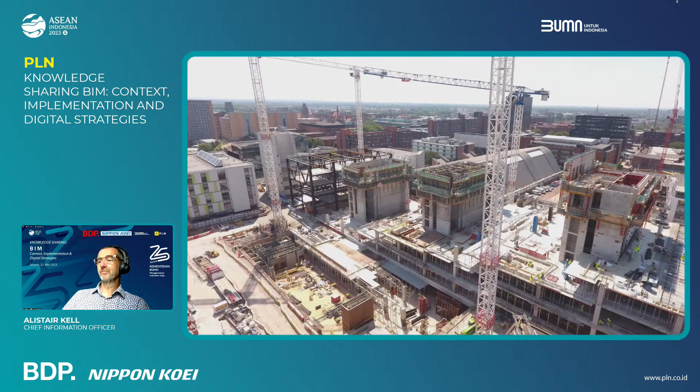The relevance of it is that everything I'm going to show you is a BDP project, built utilizing BIM from very early stages. This campus building opened in September of last year and is a major part of BDP's portfolio now.

A little bit about BDP: we have about 1,300 staff as part of the Nippon Koei group. Overall we're about 4,000 staff, and BDP has 19 offices across the globe. The majority of our staff are based in the UK, about 900. We have 250 staff in Toronto, and then offices in New York, Lima, Dublin, Rotterdam, Abu Dhabi, Shanghai, Singapore, and New Delhi.

BDP ourselves have 17 separate architecture, design and engineering disciplines, predominantly architecture, civil and structural engineering, mechanical and electrical engineering, public health, but we also have landscape architecture, graphic design, interior design, and everything really required for buildings. I have 3 projects I'd like to show you around BIM that we are currently involved in or have recently completed, just to set the scene on the scale we work at.

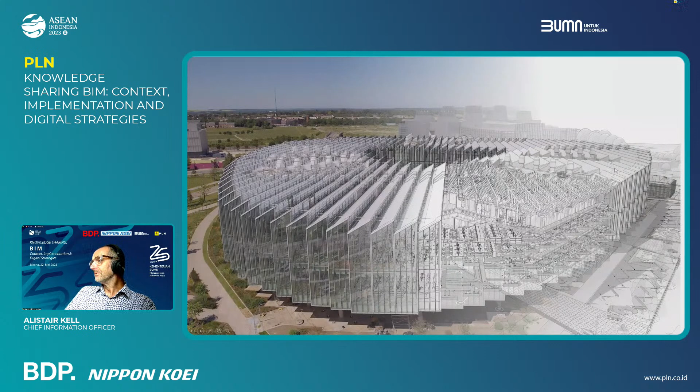The first is the AstraZeneca Global Research and Development Headquarters at Cambridge in the UK. This visualization begins to describe the research and development building itself. This was delivered utilizing BIM. The concept design was developed by a Swiss architect, but from the beginning of the process, BDP provided all of the engineering services and then architectural delivery services from the end of concept design.

You can see here the building above ground, but there is a 2-level basement. This begins to show the models for the main building. What's also interesting is in this top corner, you can see the models for the energy center, the heat pump array, which sits beneath a car park.

Moving on to the next slide, you can see this in more detail: a sustainable energy approach with ground source heat pumps and a service tunnel linking the basement of the main building. So BIM, you can see here, being utilized to coordinate the external services and begin to coordinate the structural arrangements, both concrete and steel, below ground and above ground.

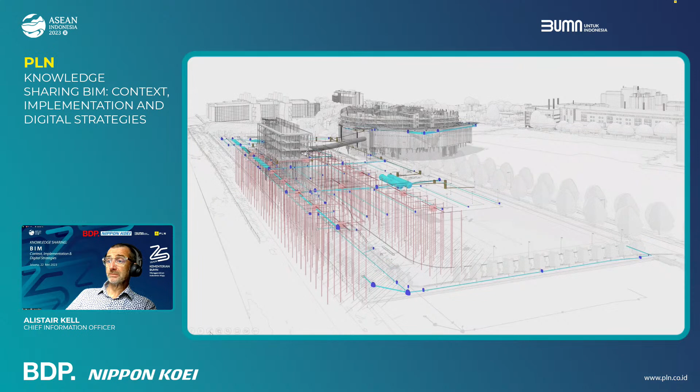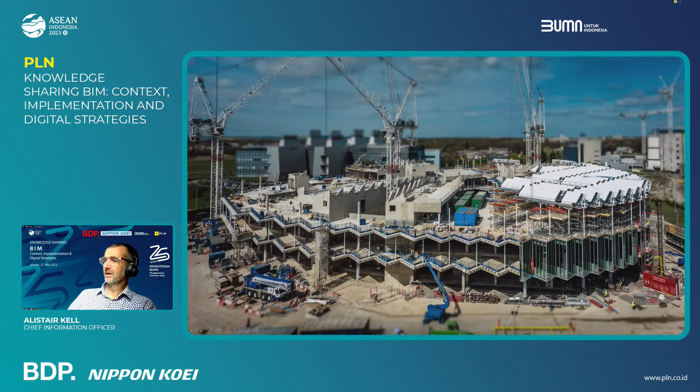This is an image of the building during construction. I won't go into much more detail, but other aspects were the pre-coordinated and pre-fabricated roof system here, and you can see the building as it's been finished and handed over in spring this year.

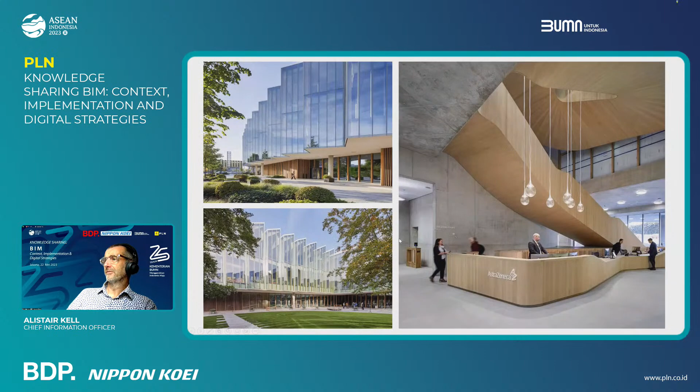Some more interior and exterior shots, and then a final picture of the main building itself. The scale of this is hard to understand from this image, but the perimeter of the main building is about 1 kilometer.

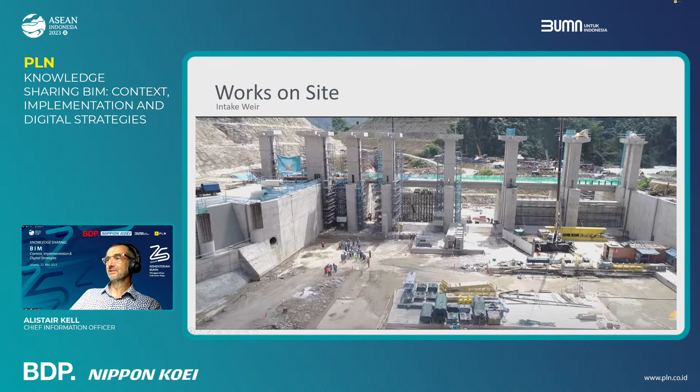The Asahan Hydroelectric Power Project, as Mr. Felix has mentioned, is another interesting project because it demonstrates the civil engineering aspects of BIM and what it can bring. Here we have a model of the intake weir and a construction photograph, so you can begin to understand the scale of the project, which is hard to properly realize from the model itself.

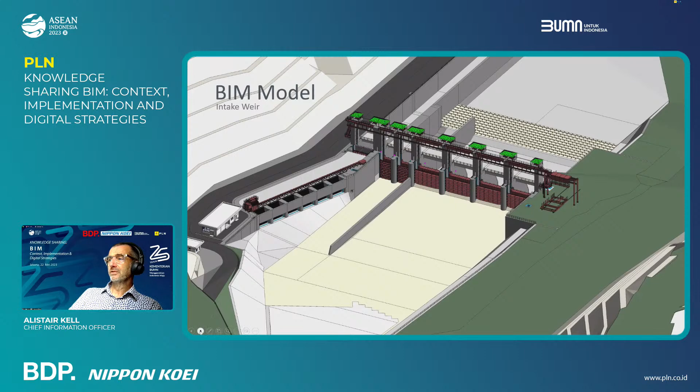Going back to the model, you can see that the concrete works, engineering works, and equipment are all beginning to be modelled. Moving on, the powerhouse and the coordination model.

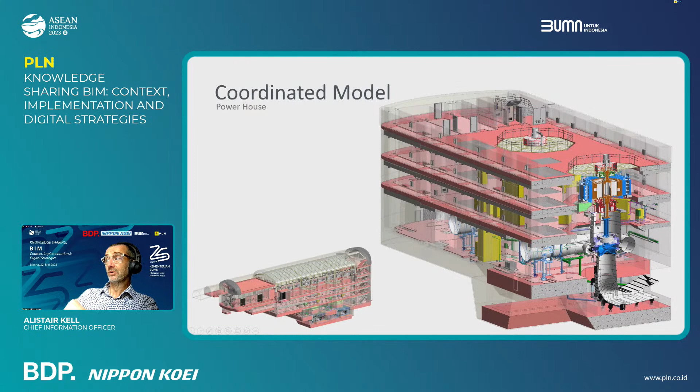So you have the main model here on the bottom left, and then the large scale image shows the coordinated model with the turbines and the significant engineering equipment coordinated into the building model, which I'll talk more about in future slides, and then how this is manifesting itself during the construction process.

And then one other very different project, but something that BDP is immensely proud of. At the start of the COVID-19 pandemic in the UK, BDP was a key part of a team that provided 10,000 COVID emergency intensive care beds across 6 locations, where exhibition centres were requisitioned to be used as emergency hospitals. Over 6 sites, 2 weeks for each site, we delivered a total of 10,000 beds. This here is an image of the project that was in the ExCeL in London.

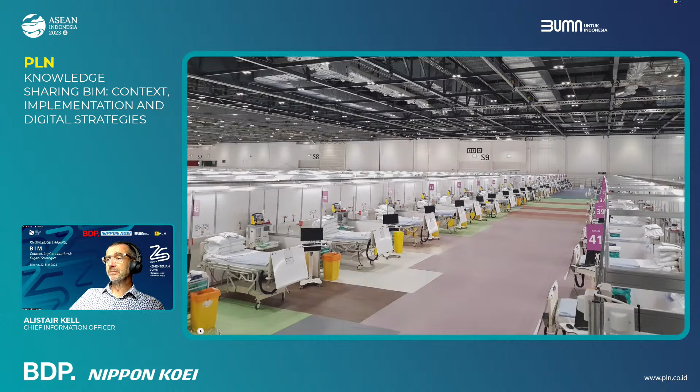The outcome of this was driven by our experience in hospital design. We were very quickly able to define what was required, very quickly able to tailor solutions to different facilities. But we then set out a simple plan that anybody could follow, and this was published globally to show the necessary kit of parts and the processes to implement similar facilities.

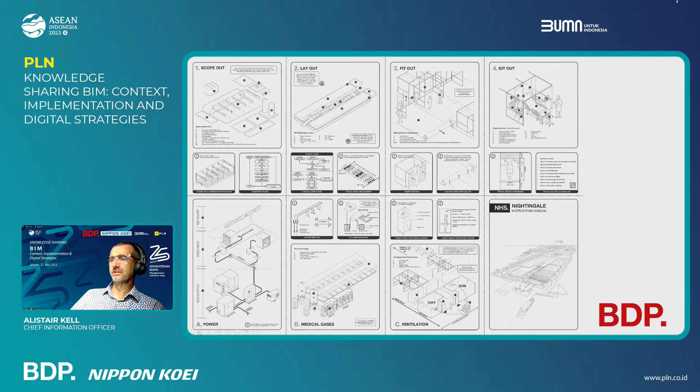So I'll move on now and talk about why BIM. Why is BIM seen as being important? I think probably one of the most important points to get across here is that BIM is not any one thing. BIM is not necessarily a model. It is about digital transformation. It is about different ways of working to reduce waste, reduce inefficiency, and to allow more determined decisions to be made for the betterment of a facility, of an organization, or whatever it is defined that the target is.

So to put this back into the context of what's been happening in the UK, the UK's journey began in 2011 when what is described as the level 2 BIM mandate was issued. This said that UK government would require fully collaborative 3D level 2 BIM as a minimum by 2016. So we had 5 years to implement. What it also said was that 40% of UK construction work is within the public sector, so it's government funded. And this focused the industry on the importance of BIM adoption.

So the question is why was UK government doing this? If you take a step back from technology and digital transformation and understand that the UK government was trying to figure out how they could deliver more for UK society based on tax revenues, they wanted ways of spending that money better. So they believed that in looking at what digital transformation and BIM could do, 1/3 of the total cost of ownership of an asset could be saved over the life of that asset. So if they have money to fund 3 assets and they deliver those through BIM, they can deliver an extra asset for the same money.

And this is not just around the design, the construction, but it's the whole life operational cost, being as effective and efficient as you can. Faster delivery: they believed that by adopting digital processes, the overall time spent on assessing, building business cases, justifying, and then designing and constructing assets could be reduced by 50%. So effectively, they were looking to bring services into operation within UK society more quickly. Schools would be available where they were needed, hospitals where they were needed, and they would be available sooner.

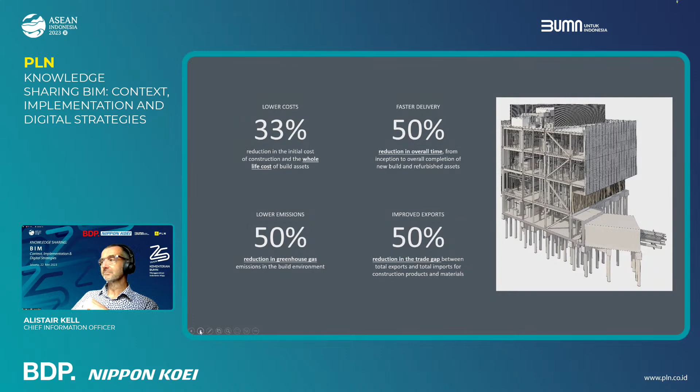But as you can see, it's not about BIM. It's about running an effective, efficient economy and ensuring that money is best spent in ways that will benefit society. So what were the challenges to be overcome? Now, what I have on the screen are the challenges that were defined by the UK. I've picked out some of the key ones, but I'm quite sure every economy will have similar challenges, though some may be specifically tailored to local environment, local conditions.

In the UK, the rework costs during construction were being found to potentially be 20% of construction value. So being able to reduce errors during that design and construction process, having a more determined approach, will make it more efficient.

It was recognised that transport and energy supply was contributing to a large part of the UK's greenhouse gas emissions, and a different approach was seen to be able to reduce that. Traffic congestion was costing the economy £31 billion, and by having more effective and efficient traffic systems, predicting flows and addressing requirements before pressures built would support that. And disruption from flooding was costing the UK economy over £1 billion a year, so decisions around where facilities were being built, how flood prevention was being managed, needed to be more determined.

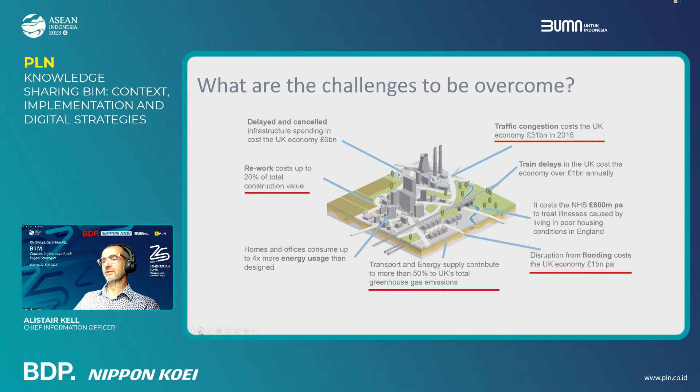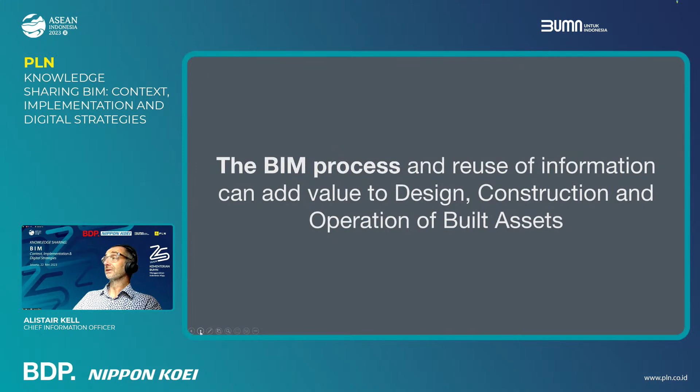If you put this into any country, you can very quickly begin to understand what specific challenges are, so what you need to focus on to address them. But the key part is that the built environment is becoming part of a smart, connected world, and it's data that's driving this. As you start to move into this for the built environment, adopting BIM gives the foundations to be built upon. And the BIM process and reuse of information can and does add value to the design, construction, and operation of any built asset.

So what I want to talk about now is the information and value being derived from BIM uses. The key point is that you work in a consistent way to build data, but the value is actually understanding how you use that data to get value, and how you build the data to ensure it can be used multiple times in multiple ways. Every project will be slightly different, and every organisation will be slightly different, but it's the BIM uses that matter. So a brief explanation about what BIM actually is.

Well, it's a process or a workflow of creating a virtual model which describes a building or some or all of integrated information. So it will have geometry, components, and assemblies. Within that, it will have design intelligence of data added, that can be used for analysis and simulation, for manufacturing and construction, for procurement, for collaborative design, to generate schedules and specifications, to resolve design conflicts, to manage assets in operation, to ensure the safe demolition and recycling of built assets.

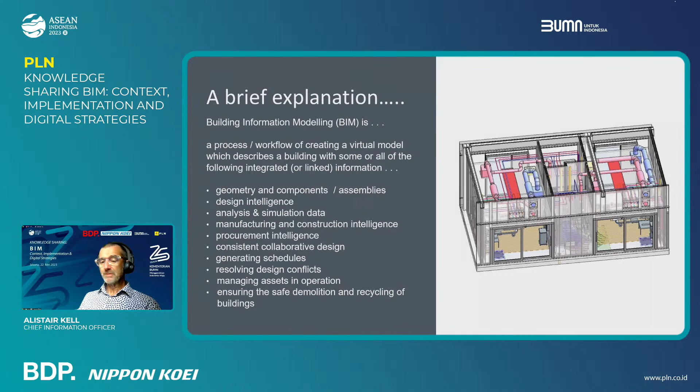But fundamentally, what's on the screen now, I think, is key. It's about geometry and data. Geometry is used for the coordination and visualization, and the data is what's built and attached to each of the geometric components. So in working in BIM, you do not draw the representation of a vessel. You create a virtual vessel that is placed in space and has information attached to it, and the information you attach is what's used to drive BIM uses.

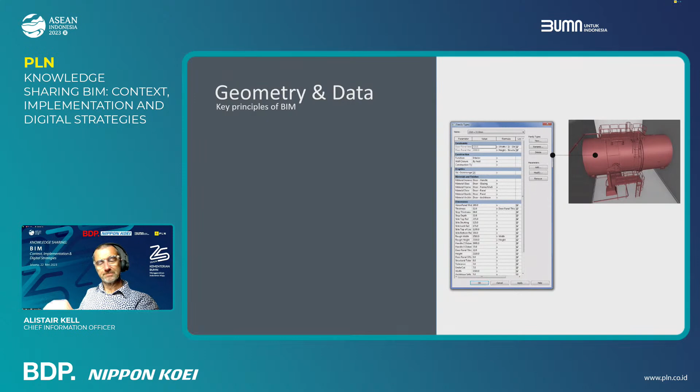It can be used for design coordination. So coming back to the ASEAN project, this is a view of the power hall, and here you can see the integration of the turbines into that space. So you can have a more determined approach. You can test and validate before you build, and you have far more confidence of the level of accuracy you're going to get. You should be constructing in a more efficient way with less need to rework.

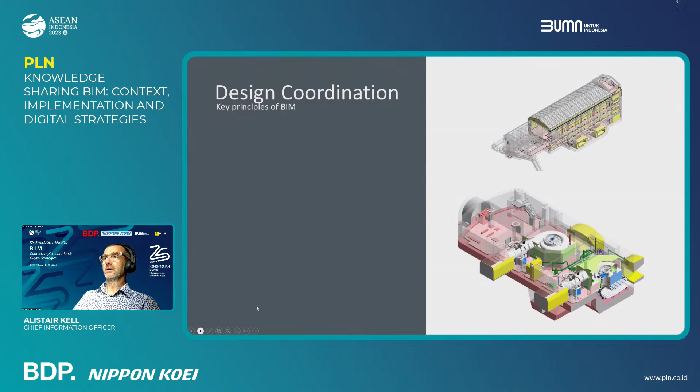That coordination moves further. So if you have a library of components that you typically use, these are easily to hand, and you can ensure that service runs are fully coordinated, and that those that are building can understand how it should be put together with far more certainty. Equally, you can then check and verify that standard ways of methods of working are being used. This image towards the bottom shows a facility, and each one of the green boxes is fire stopping to ensure that the fire resistance of this wall is maintained.

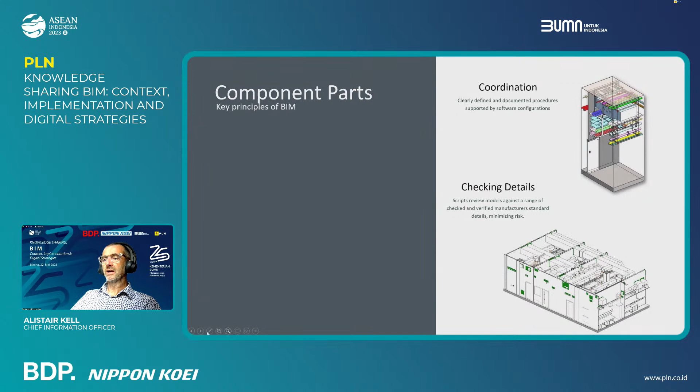But within the UK, we are only allowed to use certified details, so they have to be of a certain size, it cannot be larger. We have a standard component library that utilizes these, and we can check in an automated way that the design complies with regulations, and that allows us to have automated checking. So here we have scripts that are run to test and validate design, and I show a little bit more about this later in the presentation.

We are able to align specification with models. So large scale text specifications are written with software that links to the model itself, so we understand every component has a specification. We can check that. We have uniform references, and we automatically generate schedules with specification references between the model and the specification authoring software. So we're confident that everything is better coordinated, confident that the level of design is accurate for the stage of the project, and we also have greater confidence that nothing has been missed because the software tells us automatically.

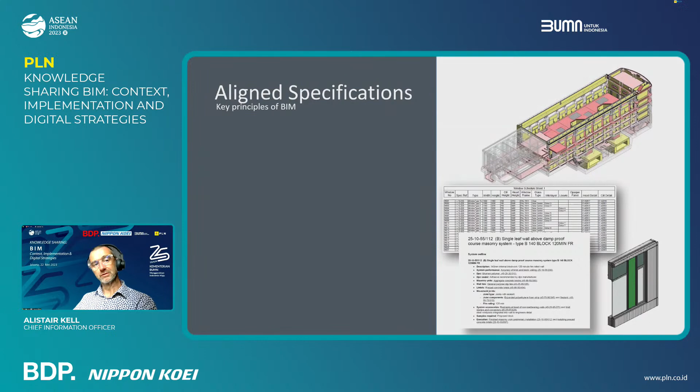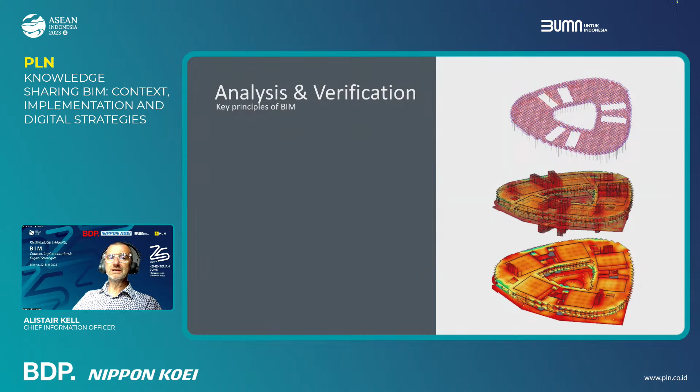We can carry out analysis and verification of structural, services, and environmental aspects. Here you can see the deflections on the AstraZeneca slab, moving through to the lightweight steel roof structure and how that's tied together. Visually understanding where the issues are, where the risks are, makes it easier to communicate design ideas as well.

Data management becomes far more fundamental. What I have on the screen now is an image of a single room within a hospital. BDP designs a lot of hospitals, and it isn't uncommon for us to have 3,000 rooms. As part of the design process, we need to capture specific information about each room. On the right-hand side you can see the environmental data, design data for that room, the finishes data for the room, and the activities that will take place in it. But this all comes from a database and automatically populates drawings and provides information that's easy to access by every designer through the procurement and construction process, rather than unlinked, separate, unverified paper.

What then happens is that within every room, we position every piece of medical equipment to ensure that it's properly coordinated for services, for structure, and the activity zones around it all work. On the right of the drawing you can see the equipment list - every piece of equipment in that room, and the quantities and references. All of this comes from a database. So whilst we have the information for every piece of equipment in any one room, we can turn that round and confirm every room that any single piece of equipment is in. We will attach the maintenance periods, the replacement periods to this, so very quickly, work schedules can begin to be brought up for the maintenance within that hospital.

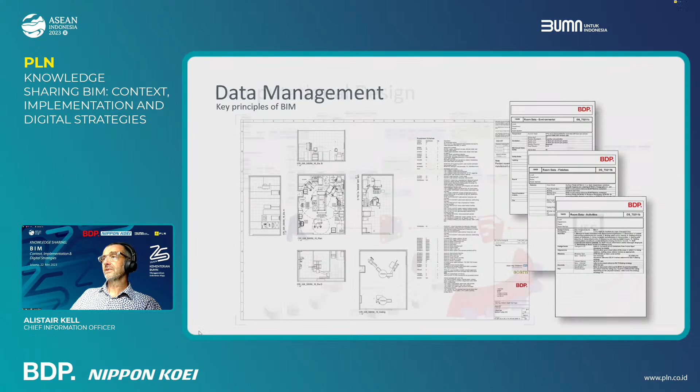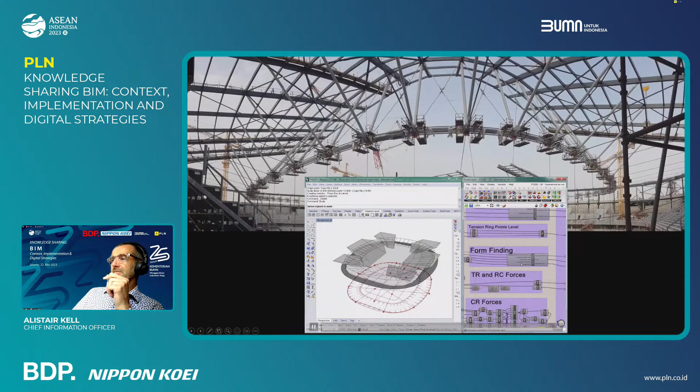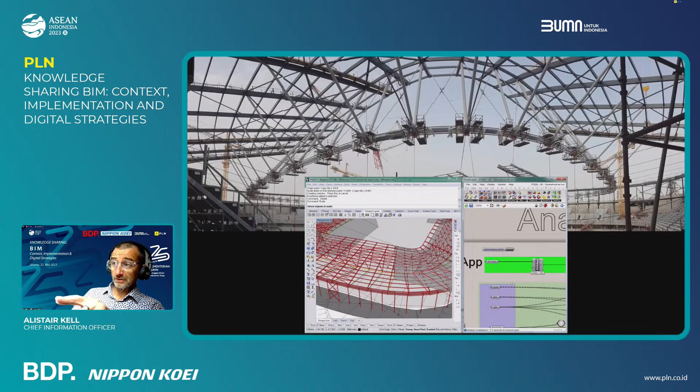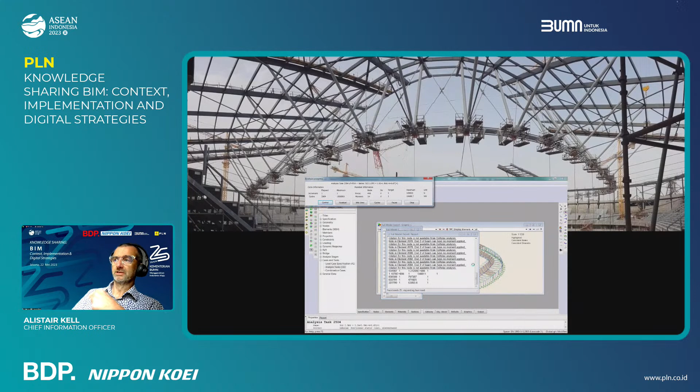We use computational design. If I move on to the next slide, it's a very short video that shows how computational design can be used to drive structural design or repeatable built forms. This is a stadium that BDP Pattern, one of BDP's companies, designed and built for the Qatar World Cup last year. You can see as parameters change, the design is understood and optimized around typical bays and curves, and this moves all the way down into the design of the concrete bowl, the seating plans and viewing angles. Using this automated approach allows us to be more determined with the way that we design.

Offsite manufacturing is something we are beginning to see real benefit from in the UK. Using the model geometry, we export specific requirements and pass them to specialist subcontractors that carry out manufacturing offsite. This gives us a number of benefits: the quality of the product from a factory typically is better than built on site, the health and safety aspects can be better controlled, the site logistics themselves are improved, and the project programme is condensed because activities start to run in parallel rather than sequentially.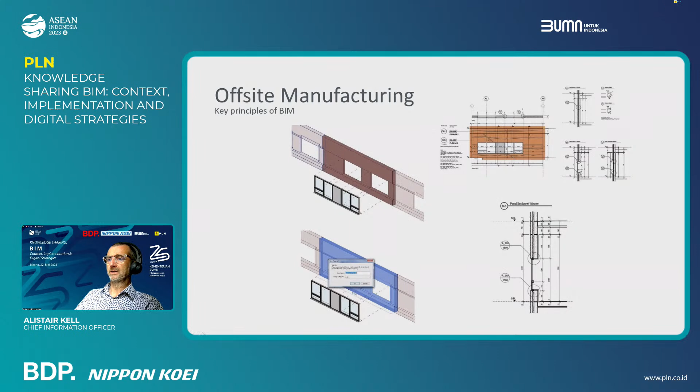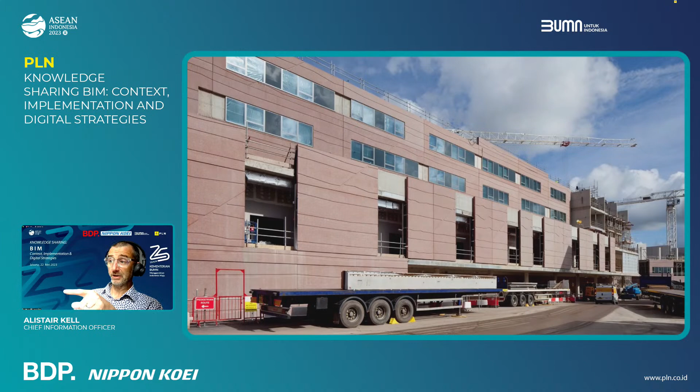What you can see here is the wall paneling arriving to the site just in time - the day before it's required to be installed. In this way, projects can be progressed in a far more efficient manner. What you're seeing here is the Alder Hey Children's Hospital in Liverpool, which was delivered 7 or 8 months ahead of the original programme because of the adoption of BIM, and in part through this offsite manufacturing process.

Then visualization and communication. Coming back to the Asahan powerhouse, the ability to generate visualization for simple design communication as an outcome of working in BIM, rather than visualizations being a separate activity, can really drive decision making and communication very easily.

It can then move to support virtual reality. If everybody on the call has a mobile phone and scans one of the QR codes in the bottom right hand side of the screen, you'll be able to bring up the virtual reality image of the powerhouse. Very simple, but it democratizes the ability to share information in quite a powerful way. We certainly found these aspects of BIM some of the easiest gains, but some of the most valuable gains for those we collaborate with and for our clients.

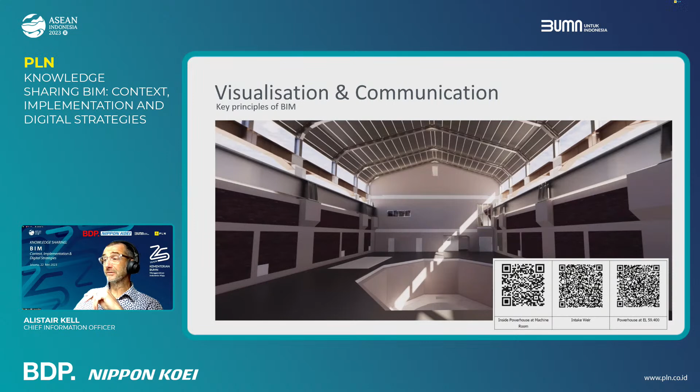And then this just takes things a little bit further, where we are able to present websites to clients that allow them to navigate around the facilities that are being designed. They can use these for ongoing stakeholder communication, but it allows them to best understand what's being created for them. I won't go into this now.

Just move on. And one of the other outcomes, this starts to talk about the design management of project management. We build bespoke tools that allow us to monitor design progress or construction progress based on the way models are being developed, the way the information is being built. So here you can see simple dashboards.

These are all developed by BDP that we run models through to understand how work is progressing. If you look at this middle section, the COBie check, everything in green shows the parameters we expect to be built at a particular point in time. We can see the amber sections are the ones that are missing. We can go in and target that work, make sure the team is getting it right. We also look at model warnings and understanding errors that may exist in the model that need to be addressed.

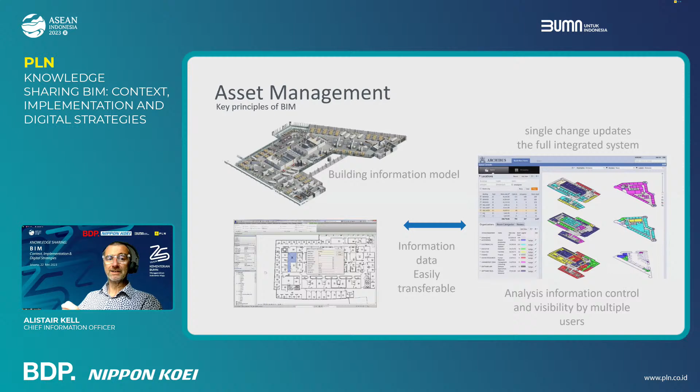So as there will be BIM uses for the design and construction, there are BIM uses and technology uses that can take advantage of this information for asset management. Now, the ultimate aim is to support a digital twin approach. The term digital twin is something that has grown in prominence over the last 4 or 5 years.

But simplistically, the intention is that you initially define a set of requirements, and the design team reviews and develops multiple options that are then assessed and evaluated. Simulations are run, and from those simulations, the designs are improved. And you would run round and round this loop until you reach the optimal solution.

That then moves into the delivery phase, where the asset itself will be built, and you will have a physical version of the digital twin. Within that, we would expect that there would be multiple sensors and monitoring devices, all linked back to a virtual twin that is constantly measuring the physical asset in its operation. And that data is captured and is used to optimize the physical twin.

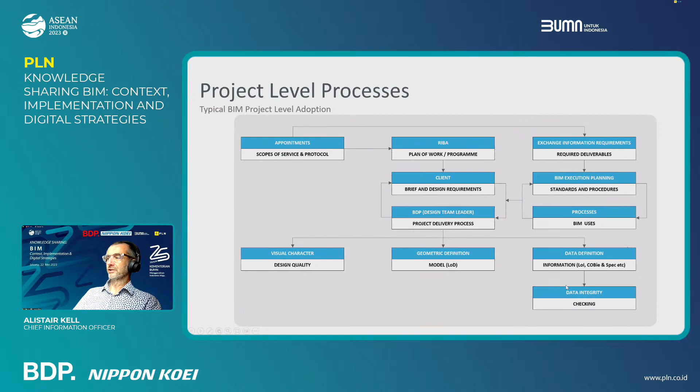They run round during each project stage with three typical outputs. We'd identify here the visual character, the design or engineering, how the brief has been achieved, the geometric definition, how it fits together geometrically, and then the data definition, the information attached to geometry, and then the ability to check. So it's about robust model and data deliverables.

Feeding into this, within the UK, there are standard suites of appointment documents now, very similar to the FIDIC documents used within your region. But the CIC is a UK Construction Industry Council. There is then a standard plan of work, a standard set of project program stages and activities that was developed by the RIBA. These are stages 0 to 7.

And these will become important in a couple of slides' time. But if you remember 0 to 7, starting with inception and business case, moving all the way through to handover and assessment and use, there's then the employer's information requirements, the required deliverables, the information deliverables, data deliverables.

The brief and design requirements, project delivery, standards, methods and procedures, design quality, model geometry, model information, and then checking and verification of that information, ensuring what has been asked for is being delivered, and the detail down to individual parameters is accurate.

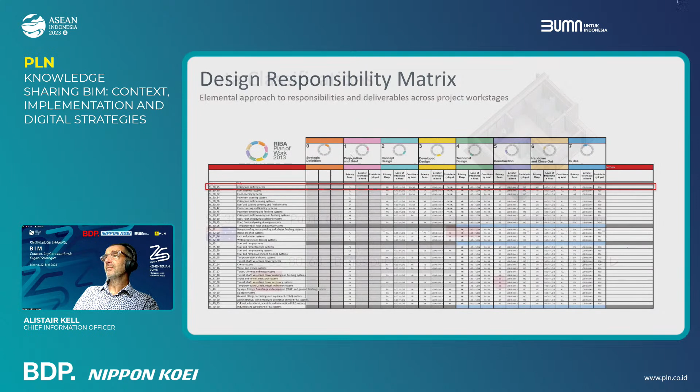Data classification is important. I've used this example because we're talking about a toilet facility, but depending on the region you work in, that can mean a different thing. I'm here talking to you in English, knowing that English is not your first language, so there needs to be a more determined means of communicating.

This is where data classification comes in. What the UK standard tries to do is have a uniform classification that's used not just across a project, but across all projects. It's almost like a barcode on a product that can be in any store. Having that consistent coding suddenly brings much more accessibility to information. Here you can see Australia, Spain, Japan, and Indonesia - the code's the same, the language is different, but the code is understood.

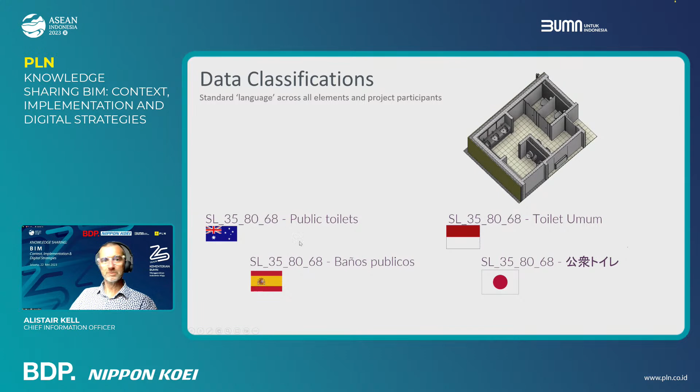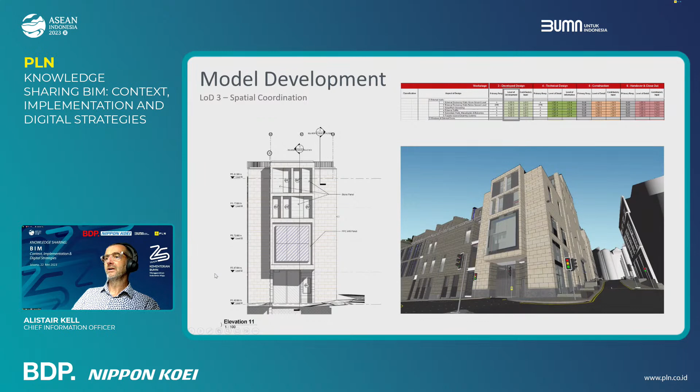Model development is worthwhile understanding as well. Here you can see we're at work stage 3, typical of the complexity we would model at that stage. It's three-dimensional, coming from BIM, but relatively simplistic because that's what's needed to develop the design. Moving forward into technical design stage, the complexity has to increase - the definition has to be stronger because you're moving to be fixed and into the construction stage.

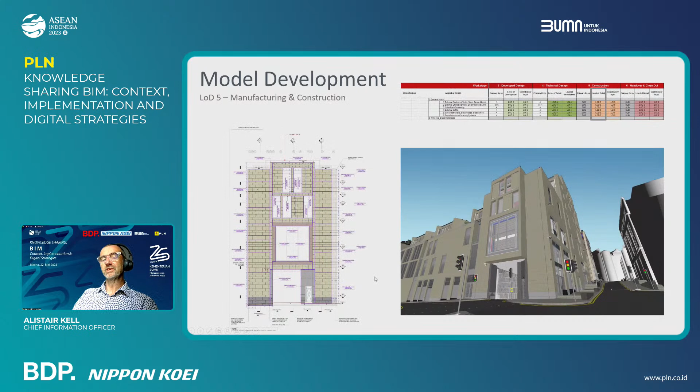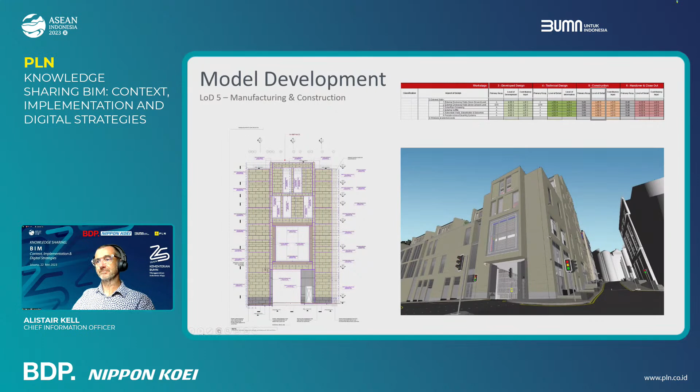The next image moves this from the designer to the specialist subcontractor who's producing manufacturing and installation drawings for the same thing based on information passed to them, so they aren't starting the process from the beginning. Then through to construction and installation on site. That shows the logical steps, the increase in detail and the equivalent increase in information sitting behind all of this.

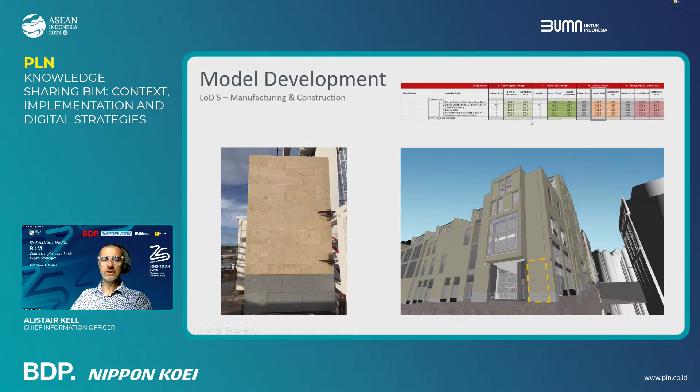This information is the really important part. What I have on the right, shown at the beginning, discusses geometry and data attached. What's on the left-hand side is our typical asset management requirement that we would bring to any client that didn't have this. It shows typically the data we would look to capture during the later stages of projects. You can see this information exchange number - number 3, number 5. These are the project points where we would look to capture this information.

Everything that is 5 is capturing procured and installed information about every asset from the contractor, so that this is all passed over at handover to be used in facilities management and asset management. This typically will be done for every unique component that has a serviceable requirement.

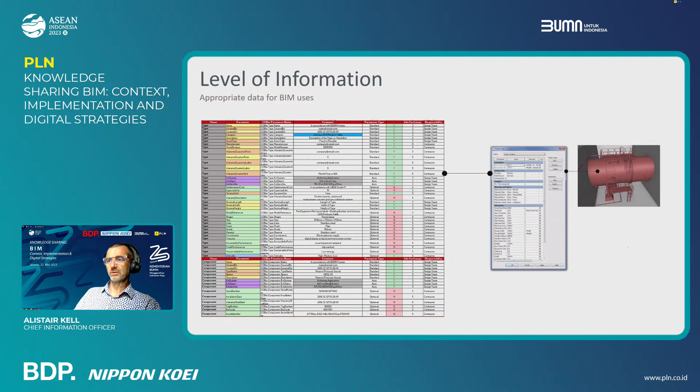Hey, is that a question? No, I think. Right, okay, now I'm very close to the end.

Simplistically, at the design stage, we saw in the UK that architects and engineers adopted BIM because it could help better coordinate and reduce risk on projects. Initially, they did this without client requirements, and it was managed by the design team. It required every member of the design team to be at an equivalent stage or have an equivalent desire, but it happened organically.

We then saw that during construction, contractors saw the benefit, ensuring there wasn't reworking, that coordination issues were addressed before work happened on site. But what we did find was that different contractors had different levels of competency, so we tried to determine the competency of contractors as they were bidding for work.

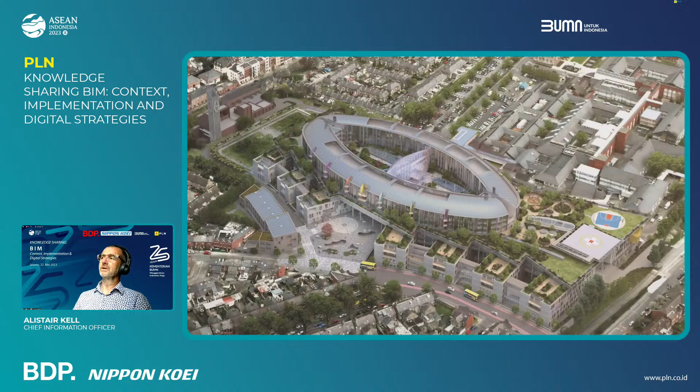We're coming to the end now. What's on the screen is the new Children's Hospital in Dublin—the largest construction project currently underway in Ireland, which BDP has delivered from its inception in 2014 using BIM methodologies. Everything I've shown you today has been adopted on this project, and it is, I believe, being handed over next year to be put into operation.

So with that, I'm at an end, and I'm happy to take any questions anybody might have. Thank you.